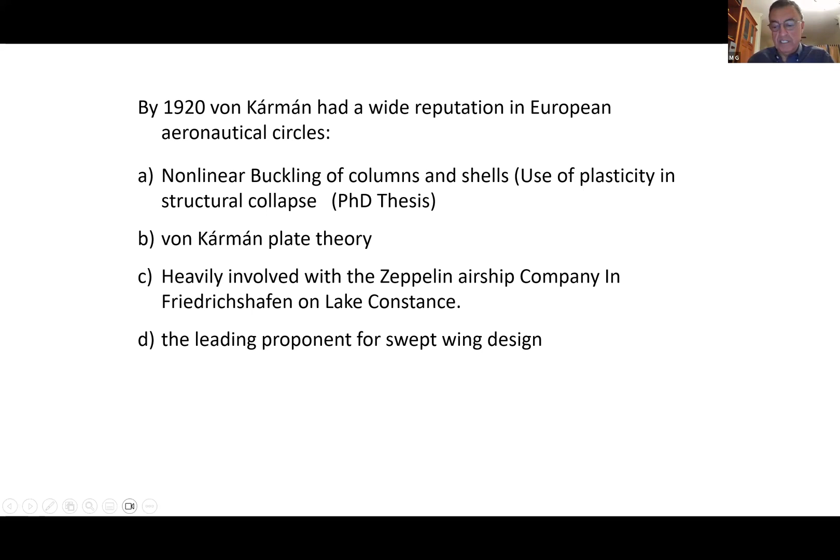Then came along von Kármán plate theory, and then he was heavily involved with Zeppelin, the airship company in Friedrichshafen on Lake Constance. And also, even at that time, he was a pioneer in promoting swept wings.

Von Kármán became really famous as a name when he basically succeeded to explain why vortex shedding behind bluff bodies like cylinders or any structures, even islands, at really different Reynolds numbers have these staggered patterns. And he used a simple linear stability model in order to explain that.

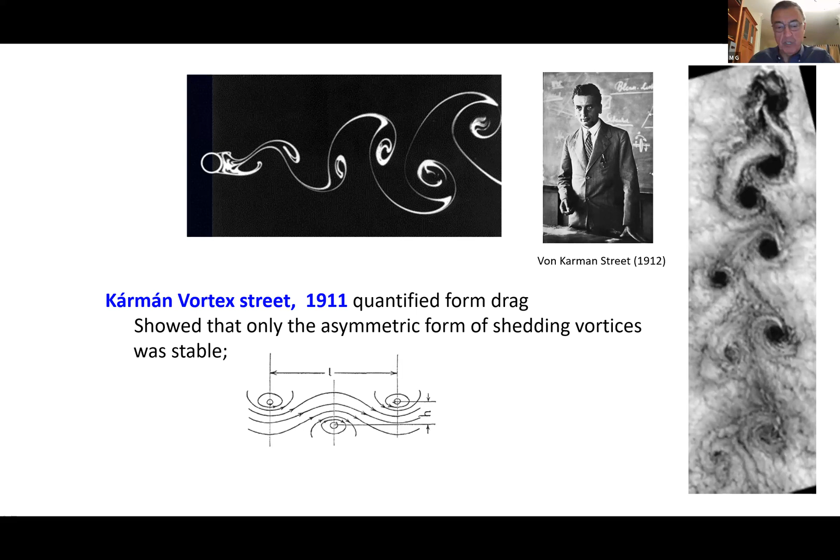And in that respect, he got the big credit. They even named the vortex patterns behind bluff bodies as Kármán vortices. And of course, these structures have been observed before von Kármán, but he was the one that actually explained why they are not symmetric, why they're asymmetric.

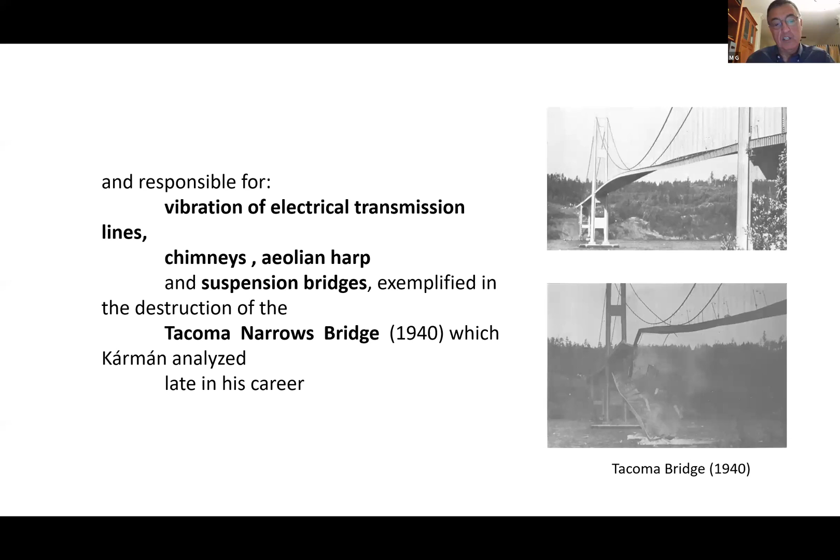And then he went on to explain the vibration of electrical transmission lines and chimneys, the Aeolian harp sounds that the electrical transmissions make under wind, and also suspension bridges. And later on in his life, unfortunately, with the unfortunate event of the collapse of the Tacoma Narrows Bridge in the 1940s, he was able to explain that.

But I believe that one of the most fundamental contributions that von Kármán has made was the establishment of the Graduate Aerospace, at that time Graduate Aeronautical Laboratories at Caltech, which even today is a leading research center in mechanics of fluids, solids, and propulsion.

It was started by a grant or endowment from the Daniel Guggenheim Foundation to establish an aeronautical school in Southern California, founded in the late 20s by Theodore von Kármán, who became the first director of GALCIT. Director in that term was both the head of department, chair of department, or at that time, or here even now, executive officer of department.

And due to his vision and the plans that he had for establishing this department, even today it has spawned and sustained the U.S. aerospace industry and ensured its prominent position for decades.

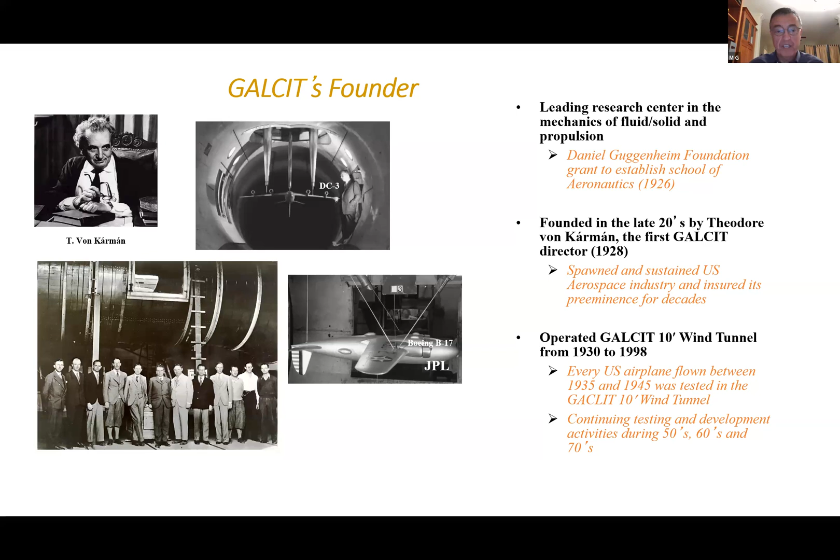But I think that another contribution of von Kármán to space science started when a student from Texas A&M by the name of Frank Malina came to Caltech in 1934. Malina was a graduate student of von Kármán. And then he had some very strange friends.

One of them was Jack Parsons, a self-styled chemist, not a student at Caltech, and Edward Forman, who was a hobby rocket fan. And then they were joined by another graduate student, Apollo Milton Olin Smith, also known as Amos Smith, and then another graduate student, Hsue-Shen Tsien, in 1936.

And there was an interesting bond among these five, their love of rocketry and encouragement from von Kármán. They started to work together, and basically began to test different rocket boosters right at the middle of the campus. And in that respect, they were called the Suicide Squad, and I will explain why.

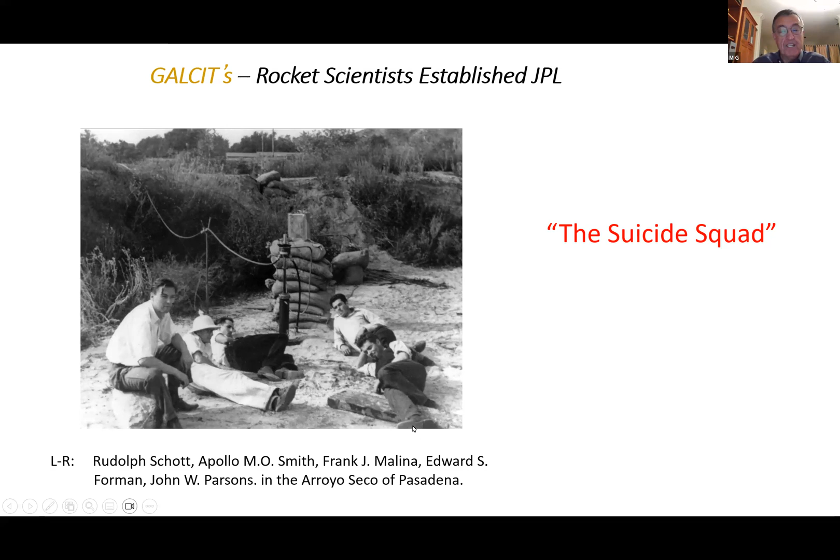They started to test these rockets, the boosters, right outside our building, Firestone building. They had a very primitive system, like a big pendulum, and they hung the rocket underneath and then fired it.

And from this angle, they measured the thrust. In one of those experiments, a rocket exploded. Unfortunately, at that time they were running the wind tunnel, and when the 10-foot tunnel was running, the whole building was under pressure, meaning pressure was lower than outside. It sucked all the soot and whatever came out of that explosion into the building and almost ruined all the instruments. And here comes really the interesting characteristic of what von Kármán was.

So instead of kicking all these students and hobbyists out of the campus and terminating their affiliation, he went to them and said, "Look, guys, I think rocketry is important. So we bought a piece of land north of Pasadena. It's called Flintridge, and you guys should go over there and do the testing, continue testing over there." This picture shows how they picked a part of the sandy riverbed and started to do the testing.

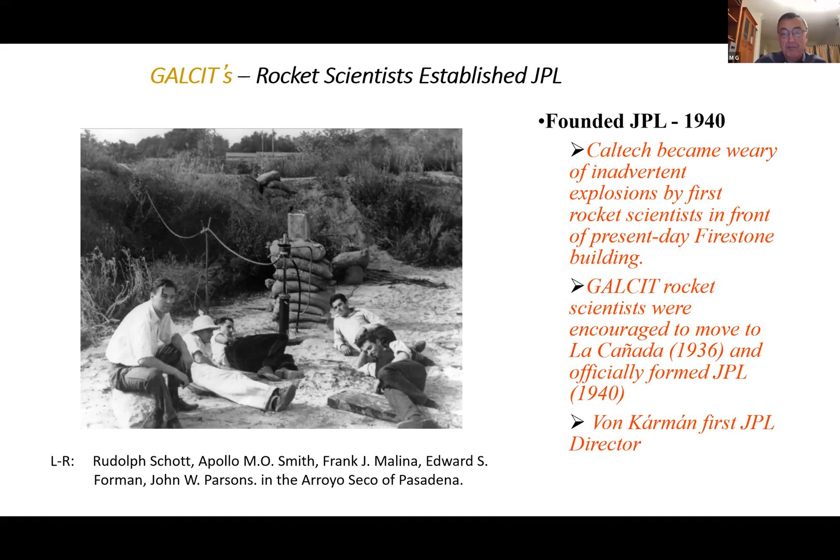It's interesting that they started this process in 1936 and officially formed the lab called Jet Propulsion Lab, or JPL. Von Kármán was unofficially picked up as the first director, but later on he became official director of JPL.

Now the group, the Suicide Squad, then later on continued their work, and they started many firsts in rocketry in the US. And they also started the first startup in the US, I would say — raised a little money and started a company called Aerojet that exists even today. It's one of the world's first rocket companies that was formed to go commercial.

And they used these rockets they invented to help airplanes have shorter takeoff distance. They call it JATO, Jet Assisted Takeoff. And then they started other businesses as part of Aerojet.

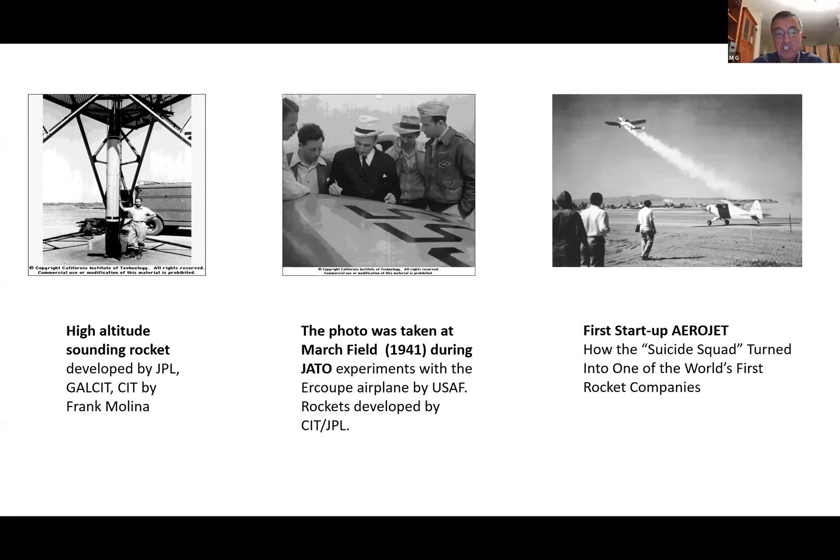JPL went on to do many firsts. The Explorer 1 was the first satellite launched by the United States, actually designed and built at JPL and Caltech. JPL was called Project Number 1 of GALCIT. The satellite sat on a shelf at GALCIT for at least 8 months before the U.S. Army decided to use it, with the Explorer.

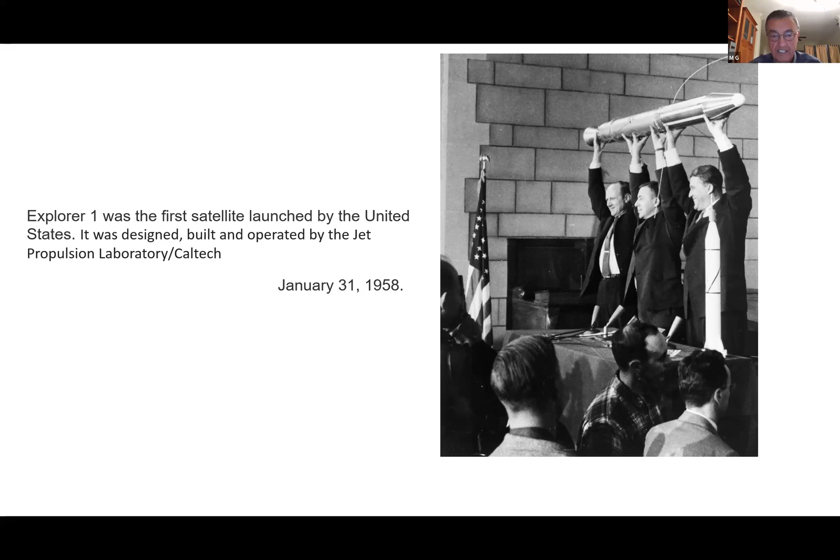And that was in 1958. Von Kármán went on to be the recipient of the first National Medal of Science, and practically became the first major consultant to the DoD, especially the Army, staying in Washington D.C. most of the time for the last 10 years of his life.

JPL went on to become a U.S. federally funded research and development center managed by Caltech, and is one of the 10 NASA centers. Currently it operates 22 spacecraft, 2 rovers, and 10 instruments in space, responsible for many space firsts, as you see in this slide — the first satellite spacecraft to Jupiter, Mars, and many others.

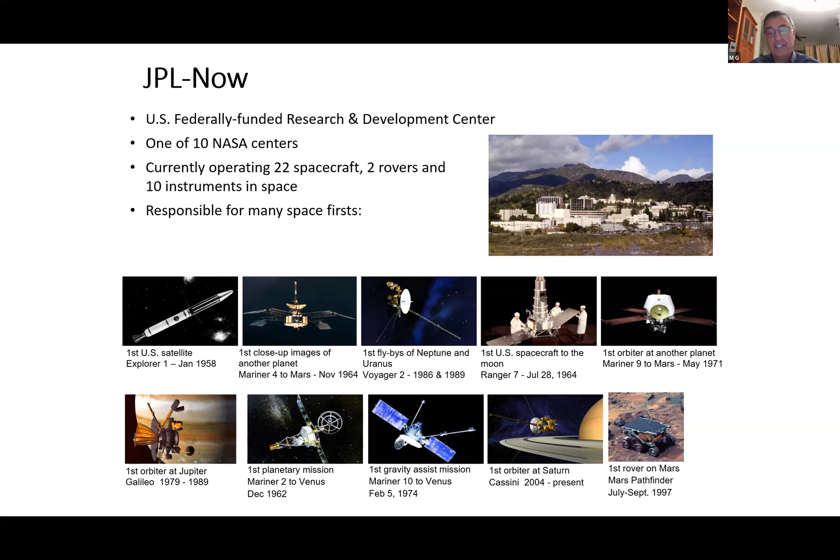One of the most recent adventures of JPL was the Perseverance rover. Basically it's a Mars rover designed to take samples and eventually return them to Earth. It was launched successfully on July 30th, 2020, right in the middle of the COVID pandemic in the US. And it was very successful.

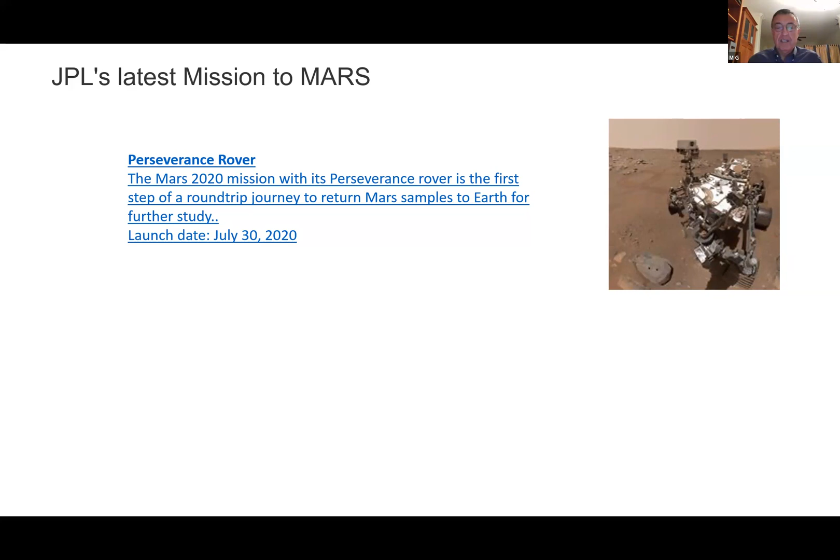What's interesting is this rover had a little companion, a guest with it. That guest was the first Mars helicopter, called Ingenuity. The Ingenuity Mars helicopter is a small autonomous aircraft sent to Mars to perform experimental flight tests to determine if powered, controlled flight at the Red Planet was possible.

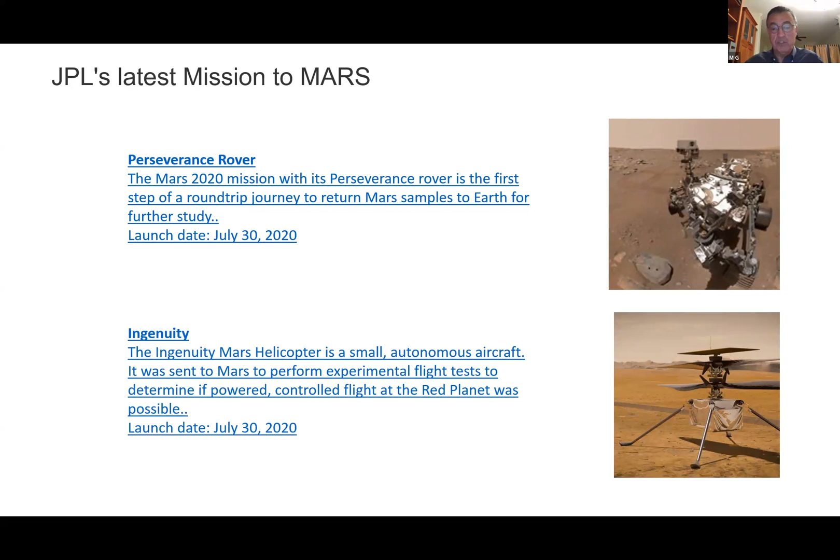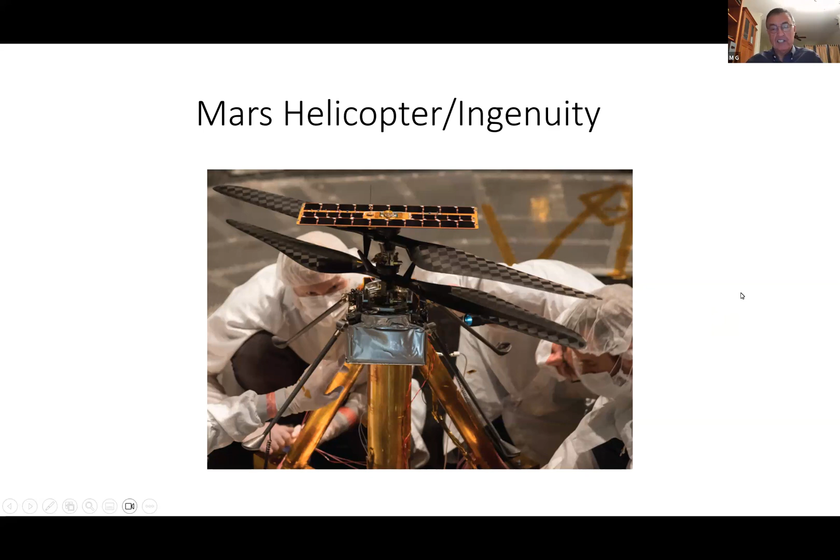And it still is operating — this is 2024. It is a very interesting design, a coaxial double blade helicopter type design, and it overcame many challenges that, according to some experts, were almost impossible at that time. But the group of engineers at JPL and Caltech together actually made this little flyer able to fly on Mars.

Now, you may ask why double blades. First of all, double blades have been used before. It wasn't anything new. You can see that George Cayley in 1796 had a design like that. Of course, you can see many helicopters and also drones have it.

It allows torque cancellation, and for payloads that require to be small, it provides compactness and also redundancy because of double blades. Disadvantage of such systems is that they have lower aerodynamic efficiency, and they're more complex in terms of the machinery to drive.

And also in power, the power is usually thrust times the flow through the disk of the blades. If you have two different blades, you'd expect double the power and thrust of the single one. But when you combine it, the disk area remains the same, so you can calculate the disk speed, meaning the flow through the disk, then the efficiency, the power requirements are actually much higher - the square root of 2 higher - than if you have two single blades separately operating. So even though efficiency was not good, it provided the torque cancellation.

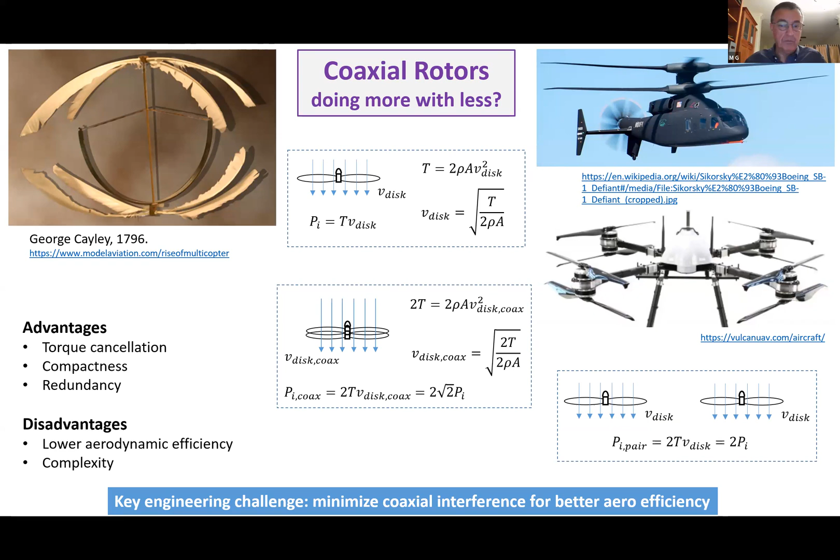Otherwise, you should have a tail to cancel the torque. And it also provided the compactness, which is really important in terms of how payload can be put together as part of the original rover.

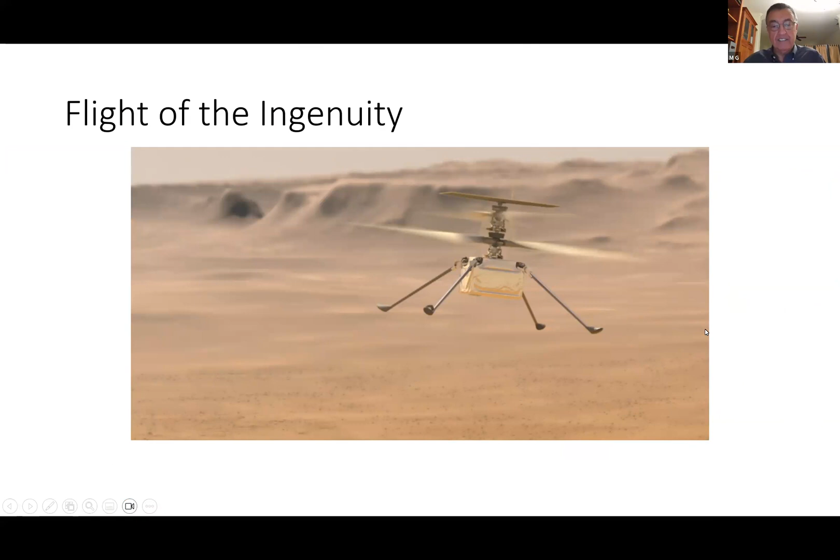So it's successfully flown, and it provided many firsts, and we'll go through my talk through it.

But what's interesting is that 100 years earlier, in another pandemic known as the Spanish flu - nothing to do with Spain, but somehow they call it Spanish flu - von Kármán was working on that with the Zeppelin company, and he was tasked to design an observational platform, manned or unmanned, to be tethered and used for monitoring the battlefields at that time for the German army or Prussian army.

And the idea was that instead of using balloons, which have much larger footprints, to use a system that is harder to bring down. So he and his engineers, Petróczy, Kármán, and Žurovec, designed this helicopter-like observational platform for scouting. And this is exactly the same mission that Ingenuity has, to scout for the rover.

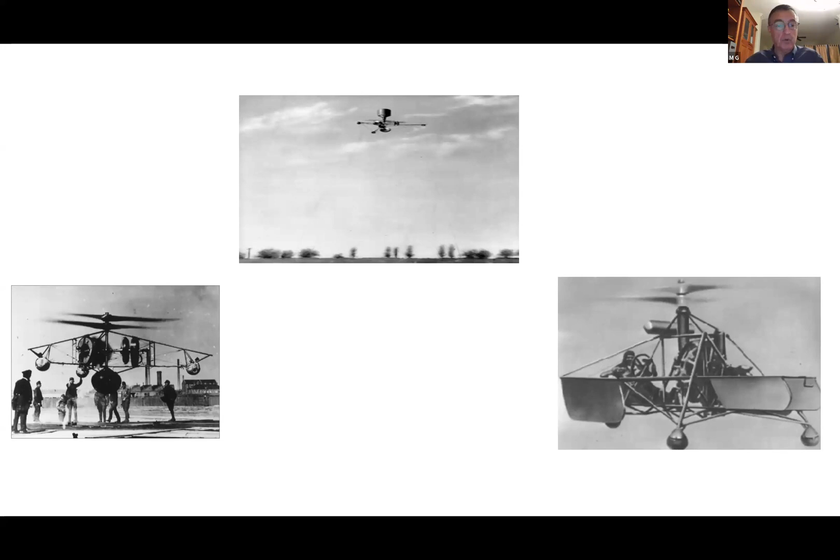They successfully flew and used it during World War I. And this is interesting, that they built both the manned and unmanned version of the same system that they used.

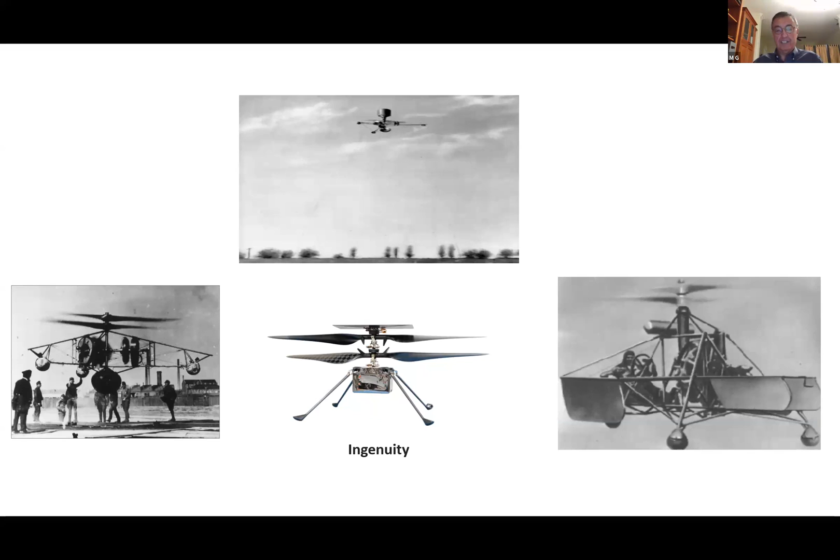What is interesting is to look at the similarity in design between the Ingenuity and the PKZ observational platform. It's interesting because von Kármán designed that one, and his students later on basically formed JPL, and later on GALCIT. They also came down with the same design, almost the same design, and that similarity was quite interesting - whether there's any relation or not, but even the serendipity of it was fascinating to us.

Now, to show you a little video, I would like you to pay attention to this little machine here. This is a real video of how the Mars helicopter actually flew in Mars's atmosphere, on Mars.

Very stable, and it provided very interesting images that usually it was difficult for the rover to go to the regions of interest - almost impossible for the rover to climb or go take a look at, say, volcanic areas.

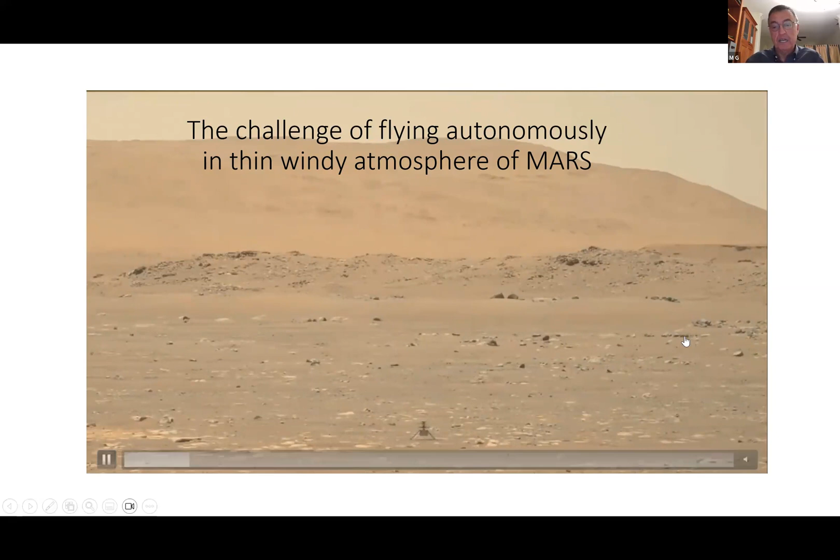But it wasn't as simple as I described. It provided many challenges. For example, the idea was to prove that powered flight in the thin atmosphere of Mars was possible.

The red planet has lower gravity, of course, 1/3 of the Earth, but its atmosphere is just 1% as thick compared to the atmosphere on Earth. So it also had to demonstrate that miniaturized flying technology is possible - that you can pack enough power, battery, and aerodynamic efficiency to be able to take off.

And perhaps the most challenging part was also operating autonomously. Ingenuity could only use solar power to charge its batteries for each test flight. And it should be performed without real-time input because it takes almost 14 minutes for the signal from the operator to reach Mars, to provide any command.

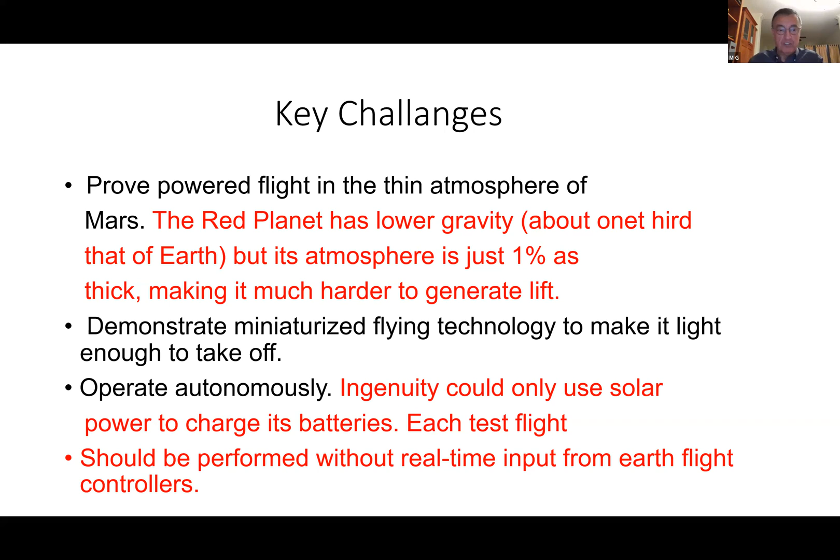And all three of those, each one of them, could have been a big showstopper for us.

Now, so at JPL, in order to study the performance of this flyer, they have this environmental chamber. It's about 27 feet wide, 85 feet tall, and they could basically simulate Mars's atmosphere.

That table shows the pressure of Mars compared to Earth, and the test section or test ambient chamber was close to 1,000 - we could bring it down. The density, we can get very close to what Mars's atmosphere has, and if you look at it, the kinematic viscosity also could be very close compared to what we see on Mars.

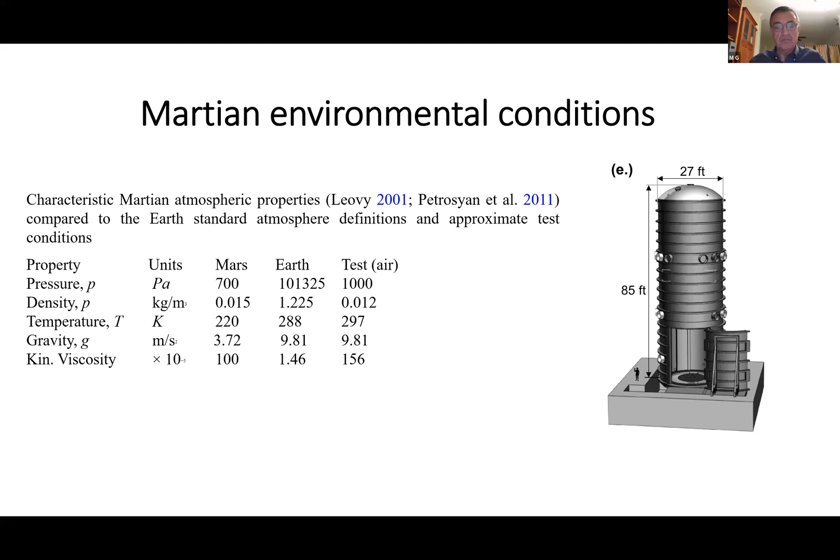Now, the point here is that even though we brought the pressure down, the density down, the chemistry was different, because Mars's chemistry is more CO, CO2 compared to Earth's, which is more nitrogen. But from a performance point of view, it wouldn't make any difference.

In that environmental chamber, to simulate Mars's atmosphere, you can only go up and down. But for a Mars helicopter, it was important to be able to do the cruising, to move around. So for the control software, you needed to perform hovering plus cruising. Hovering was possible in this chamber, but cruising was almost impossible, we only have 27 feet, and it would have been dangerous to try to avoid the walls of this big tank.

So JPL engineers approached me and said, 'Look, can you build a wind tunnel that can simulate Mars's atmosphere?' I can imagine my first reaction, 1% density, it's going to be difficult. But no, let us look at it.

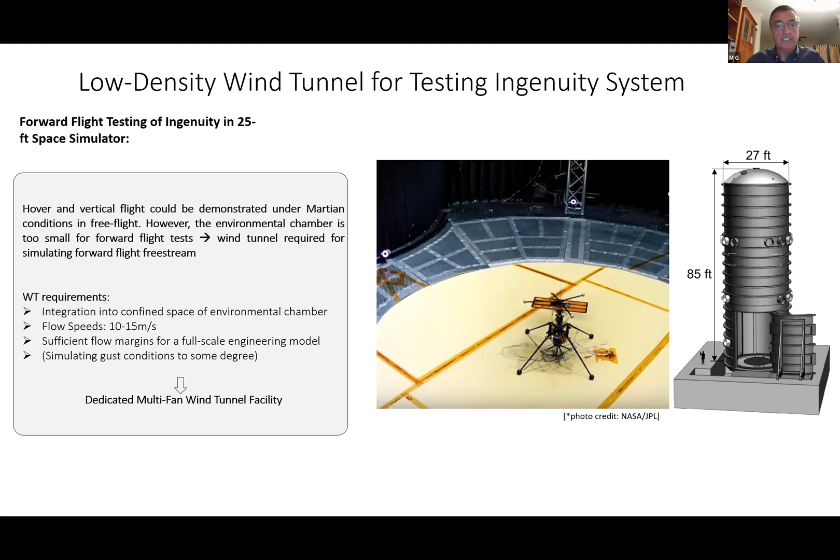And I had a very important group, I would say a clever group of students, that when I proposed this to them, they didn't even blink, and they said, 'Yeah, we'll take the challenge.' And the reason was that this same group of students had together designed another type of wind tunnel, which I'm going to go over, and you'll see how we could transition from a wind tunnel for Earth to a wind tunnel for Mars's atmosphere.

Chris Dougherty, Marcel Veismann, my graduate students, and Jason Rabinovitch, a graduate student of Professor Beverley McKeon, and then the undergraduate Alejandro Zavala was also involved, along with the chief engineers at JPL, Amelia Quon, who was the project manager for the JPL site. So of course, she had the army of students and engineers that could help us with the design and implementation of the tunnel.

Now, we have a center at Caltech called CAST, Center for Autonomous Systems and Technologies. And at CAST, we designed a very unique type of wind tunnel. It's about 10 feet by 10 feet, and it has about 1,296 individual fans clustered in 3 by 3 groups. The tunnel, or fan wall, could operate either vertically or horizontally or any angle in between, and we could control each fan individually to provide all kinds of different flow conditions.

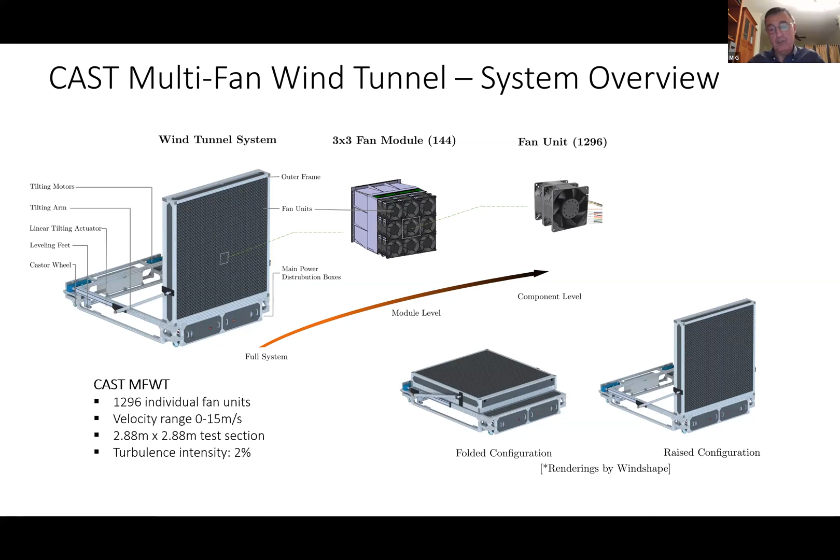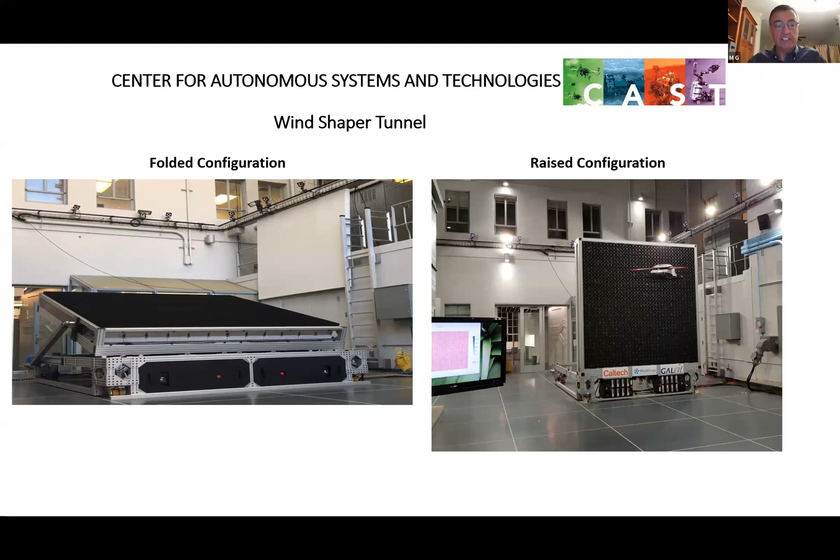Here it shows the operation of the tunnel as it goes to different angles. We could basically do hovering by blowing the air vertically against gravity, or use it horizontally as a normal wind tunnel. You can see here it's in a large arena, and we test different drones or systems that need to see different flow conditions, like gust or shear.

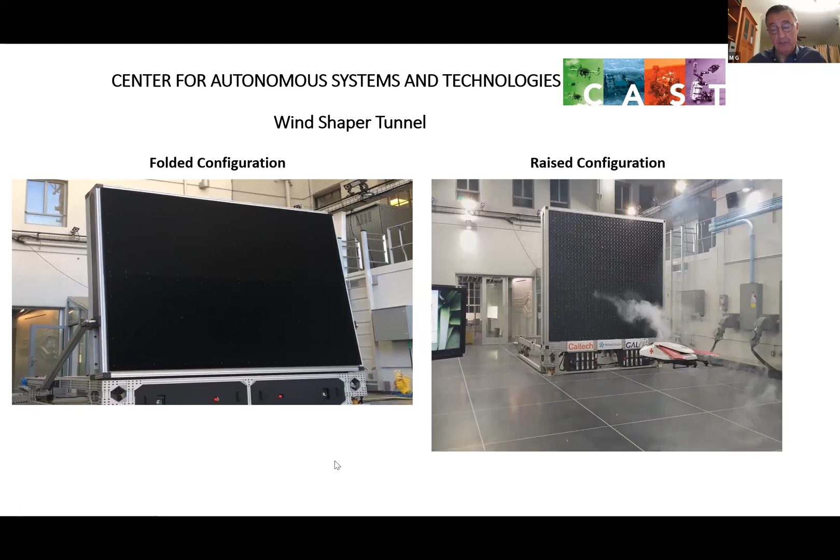I'll let you watch this for a second, it's quite impressive. And these are all designed by graduate students. Of course, we also had an outside contractor that built some of these components, and it was put together here.

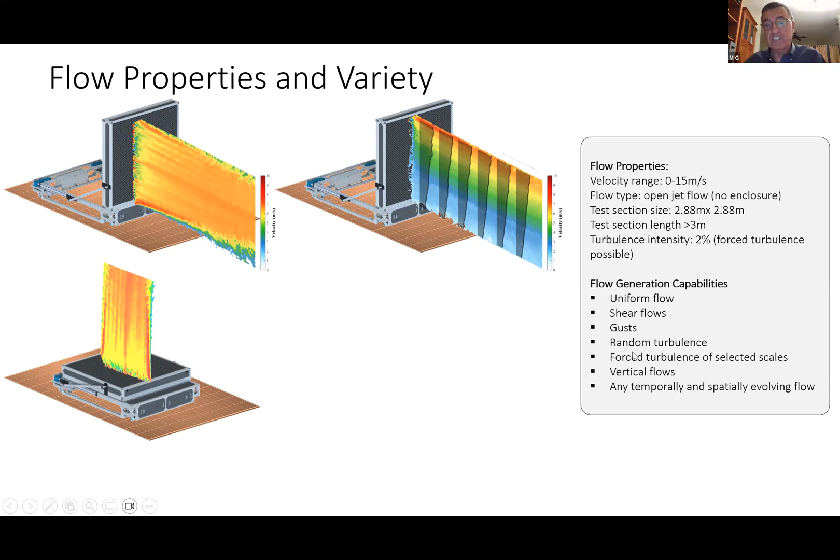Now, this tunnel, as I mentioned, can provide vertical flow, horizontal flow, and different shear, uniform flow, gust, or random turbulence. So you can see this is, for example, what you see on the screen, and you can basically put random turbulence in it or shear, as you see in this plot, to provide different conditions.

So the control software should be able to handle this under different conditions on Earth, or later on, as you will see, on Mars.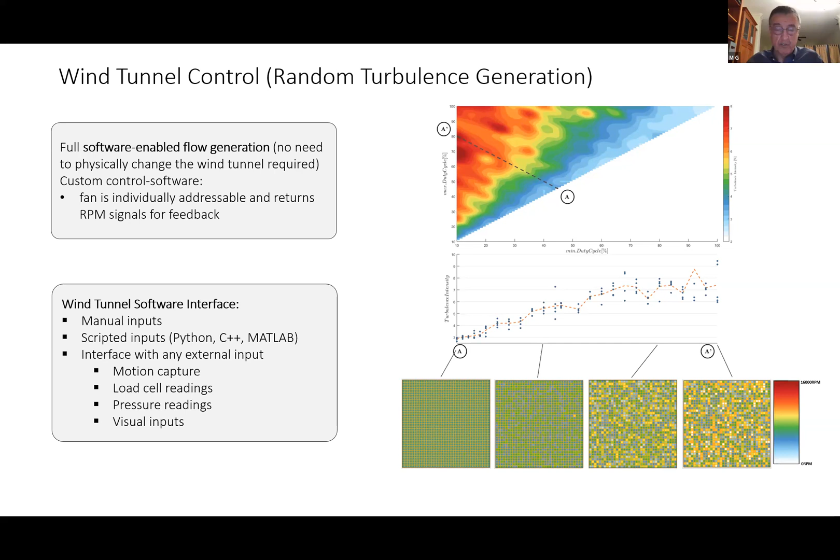The whole tunnel, the environment, has motion capture, and we have all kinds of different measurement tools, from PIV to laser Doppler, to all kinds of flow characteristics, as required by the researchers in the group or in the department.

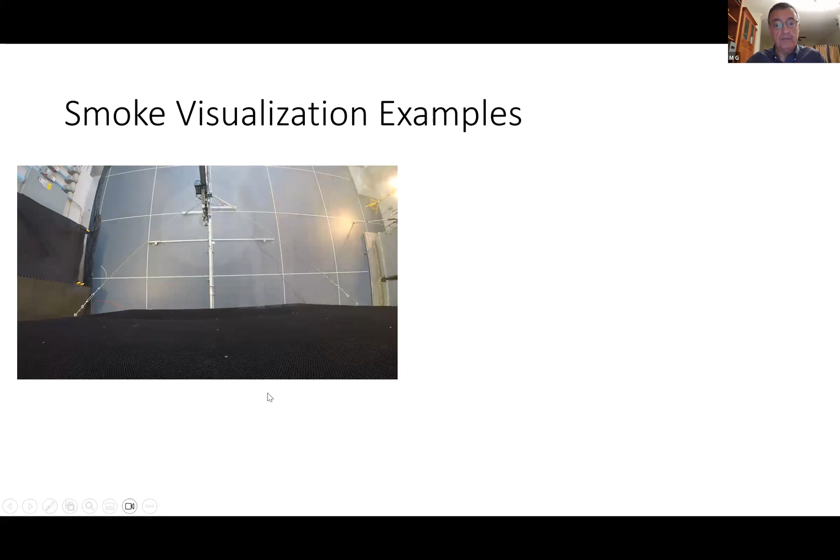I think the challenging part was how to duplicate this wind tunnel for the environmental chamber at JPL. Here you see a picture of it, this is actually the size scale, and this is the actual picture of the fan wall that's inside the tunnel. It's about 1.7 meters by 1.7 meters cross section.

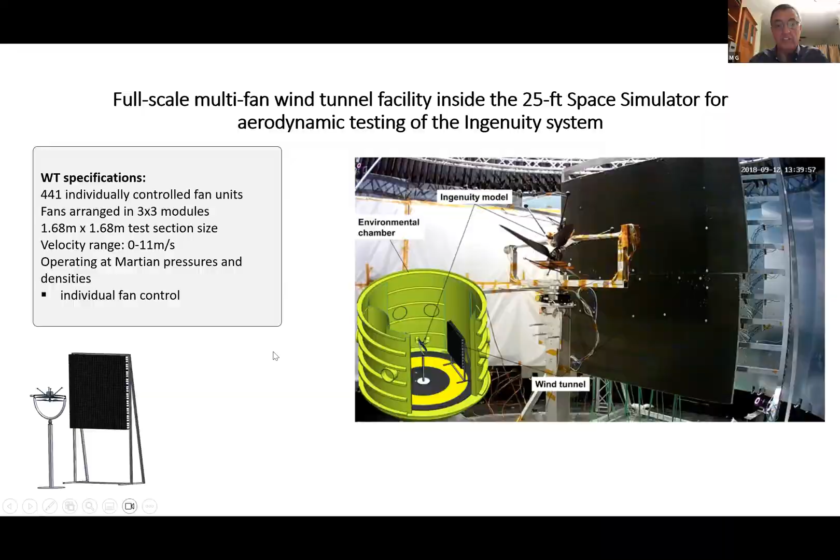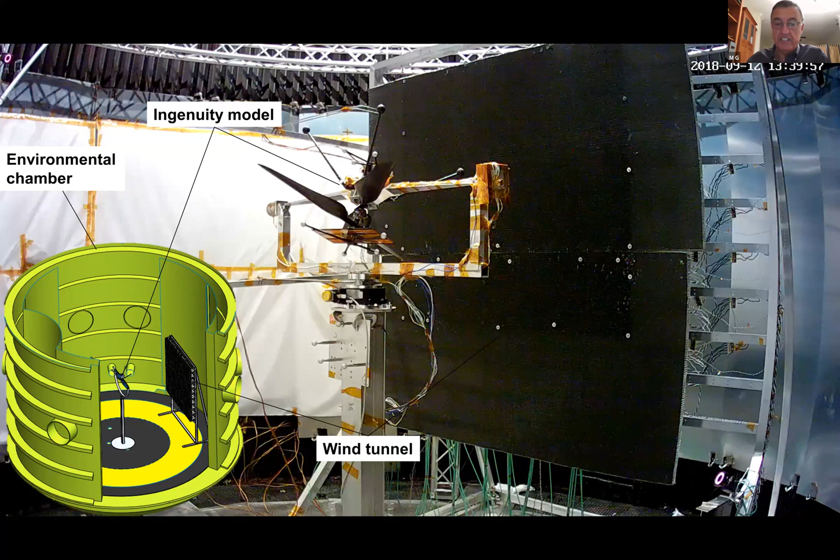It can go up to 11 meters per second, right within the range of velocities that we expect for the Ingenuity to operate on Mars. Each individual fan could be monitored. This is a close-up, and it was on a force balance, and later on was flying without any tether inside this tunnel.

One might ask, how did we design this tunnel? So we used a very simple, basic fan laws that, considering the efficiency is the same, we can then get the ratio of the flows. Q1 is on Earth, Q2 is on Mars. So we can use different densities, diameters, different rotations, and these non-dimensional parameters are what people use, not just for the Mars thing, but actually for design of the helicopter blades and so forth.

Now what's interesting here is that in these calculations we assume the efficiency is the same, but in reality it's not. The reason being that the Reynolds numbers we usually operate, especially on Mars, are really low. We're talking Reynolds numbers not more than 10 to the fourth. This is, for example, the Reynolds number we expected the Ingenuity to operate at. Because of that, the flow is very laminar on the blades, and they're very prone to flow separation.

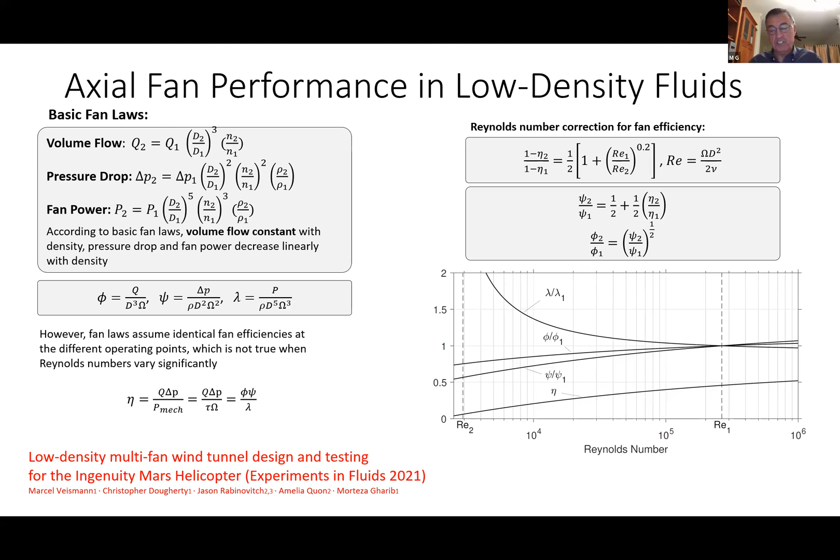Now, the other problem that we faced was a well-known problem, called vortex ring state. Imagine that as you hover, if you're not in the proximity of the ground, it's okay - the aerodynamics is basically a disk model. But as you get close to ground, at some point the flow that hits the ground gets ingested back into the blade, as you see in this artist simulation. So it creates a closed environment, known as vortex ring state.

What happens in a vortex ring state is that suddenly the thrust goes down. So as a result, the lift is not the theoretical lift, or at least the lift you get as a reference. That's a very dangerous state, and as we saw in the environmental chamber, it actually gets much worse as you reduce the density. So the question was, what should we do?

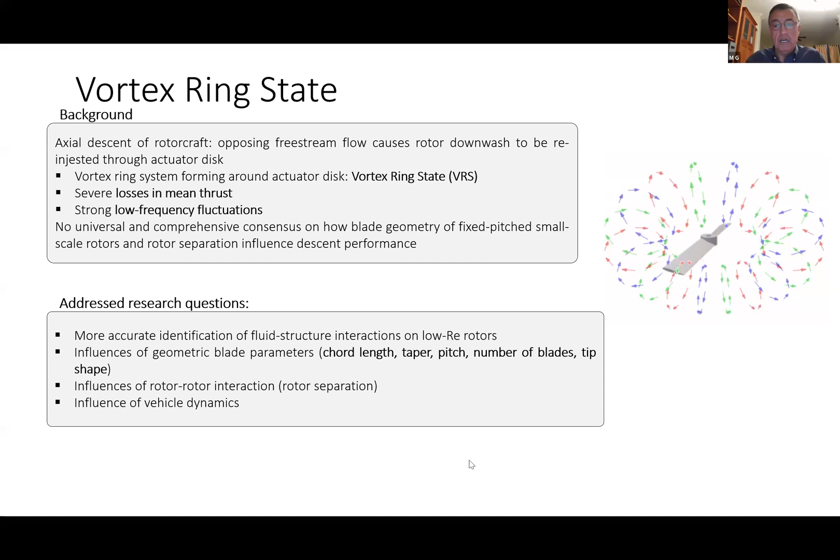So we embarked on some studies to identify what these vortex states are. Also, another state that follows the vortex state, as you increase the speed of landing, is called the turbulent wake state, where you don't ingest flow, but you create enough turbulence that the whole blade system starts to shake. That shaking is very dangerous, because all the flight control software we had, even though we knew what happens on Earth, we didn't know what happens on Mars.

But we decided to design a new set of blades that can reduce the danger of going from normal hover to safe hover, bypassing the vortex ring state and the turbulent wake state. The idea is that if you go too slow, you get trapped in vortex ring state. If you go too fast, you get into turbulent wake state, which creates lots of shaking. You need to basically go through that fast enough and get to a steady state that you can then land the Mars helicopter. These are basically the standard approaches you'd find in textbooks.

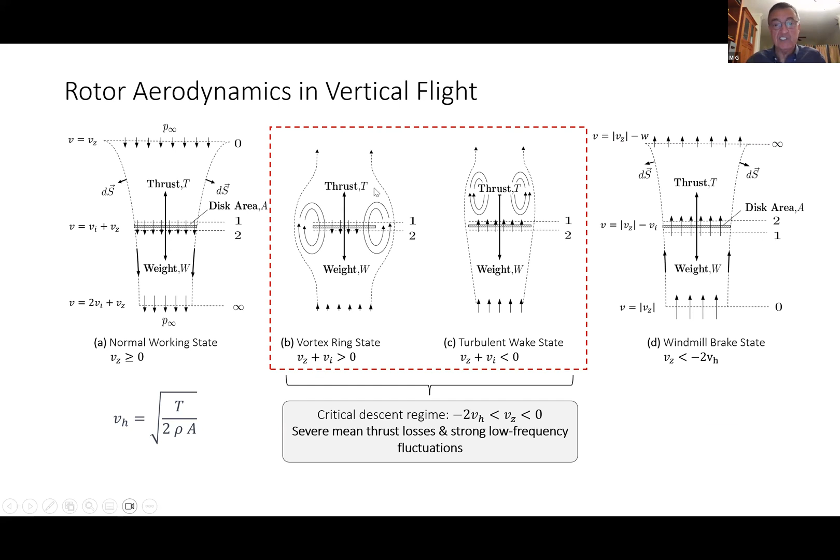The question here is: can we design a different kind of blade specifically to be able to bypass these dangerous states and go directly to a safe state?

Marcel, as part of his thesis, took that challenge to look at different blade designs. He designed a miniature fan wall, and put the blades on a force balance, and then by changing the speed of the fans, he could simulate different speeds of landing or hovering down.

Later on, he actually flew it over the big tunnel to see if the results of the tethered and untethered tests were equal in terms of performance of the different blade designs he came up with. We also used PIV, particle image velocimetry, to look at the actual physics behind this vortex state, and how the different blade designs can avoid those states, so we could have better performance later on.

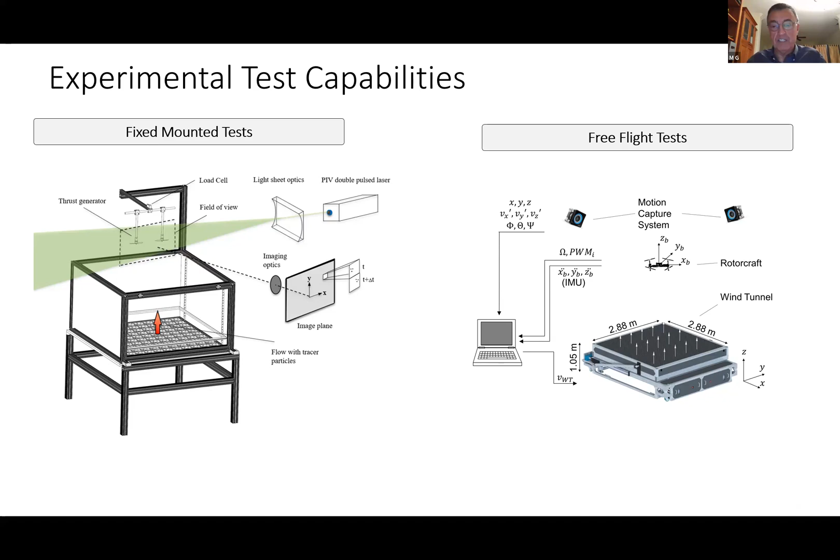I can bypass this quickly.

So usually what happens is that if you look at the thrust or lift of the blades, and as you change the climb velocity, you can see that there's always a minimum. This line here is where the vortex state is for different climb velocities. Now, if you normalize it with hovering, which is the reference, you can see that they all collapse.

And this region is the dangerous region because your lift suddenly drops. If your control software could not handle that, it's fatal to the whole helicopter system. So now the question was, these are reference commercial blades you can get. Can we design a different kind of blade that tries to reduce this dip, so control software can do much better handling of these situations.

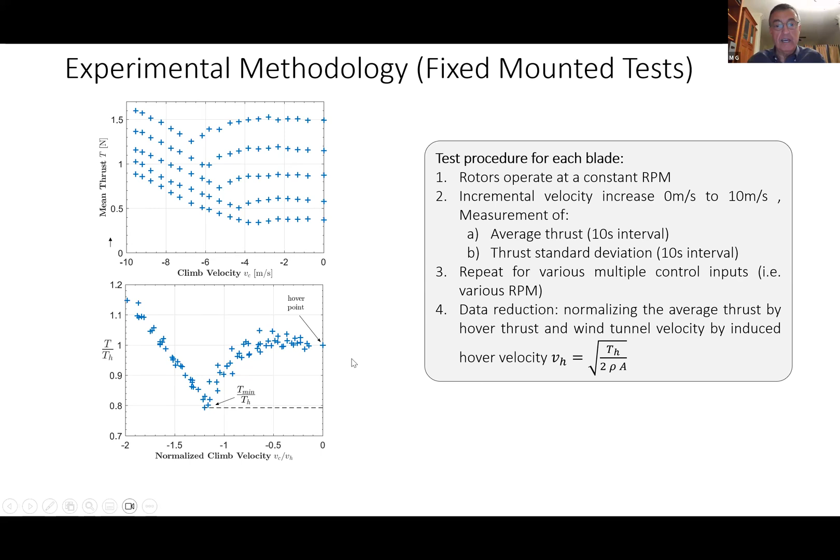We actually tried different designs, all kinds of different variations on different themes, sometimes the same themes. And then we went through this process of changing the hovering speed, and based on that, saw how we can reduce the vortex state, which was the gap or minimum that we saw. And here are some of the results.

If you recall, let's go back here. I'd like to draw your attention to b7.3 compared to other designs here, and look at their performance. Now if you look at this row, we have the reference, which is commercial, and then our designs. You can see that most of them show this dip, except one design, b7.3. Let's look at what is unique about that one.

The trick was, if you look at this design, it actually has a very sharp or thin tip compared to all other designs. Of course you could see the trend that as you get narrower and narrower, but it seemed that one was the winner in terms of trying to get out of the vortex state, which is this deep minimum.

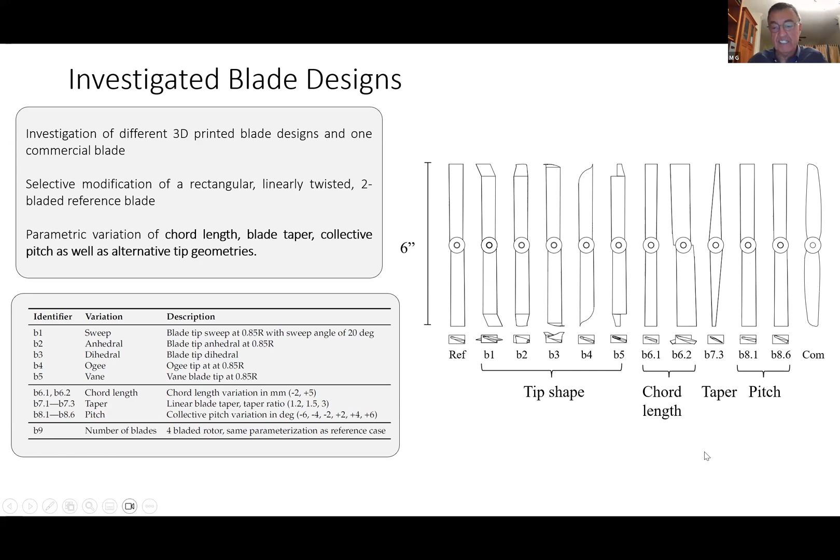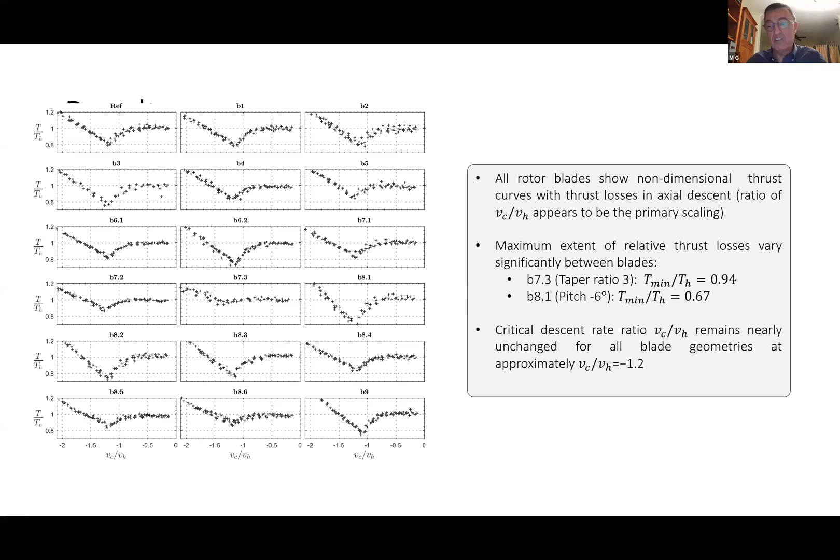So this was kind of a unique discovery that we made, which was not really well studied before. And compared to 8.1, we said it's 0.67, which means you lose almost 30% of the lift very quickly, and you need to take care of that.

Now let me just go through this. It shows that we normalize the thrust, and this is the minimum. You can see the minimum actually increases, which means this is very good performance. Anything we did over these commercial ones actually improved the performance by increasing the minimum, meaning making it more flat.

These are more of this. You can see that we actually could make it really much worse than even the commercial ones, and that was 8.1. So anytime we use the chord length - increasing the chord length reduces performance, tapering it increases performance, having a pitch increases performance, but increasing just the number of blades reduces that to a point that it becomes a disc, with no performance.

So let me just show this - this is the compilation of all the results we have, which is actually a good design table for the future if you wanted to get different performances.

Now the other things - remember the turbulent state - we were more interested in what kind of... let me just... on the turbulent state, we also realized that this is the level of fluctuations. I think I'm showing the wrong one, sorry. This, if you can allow me.

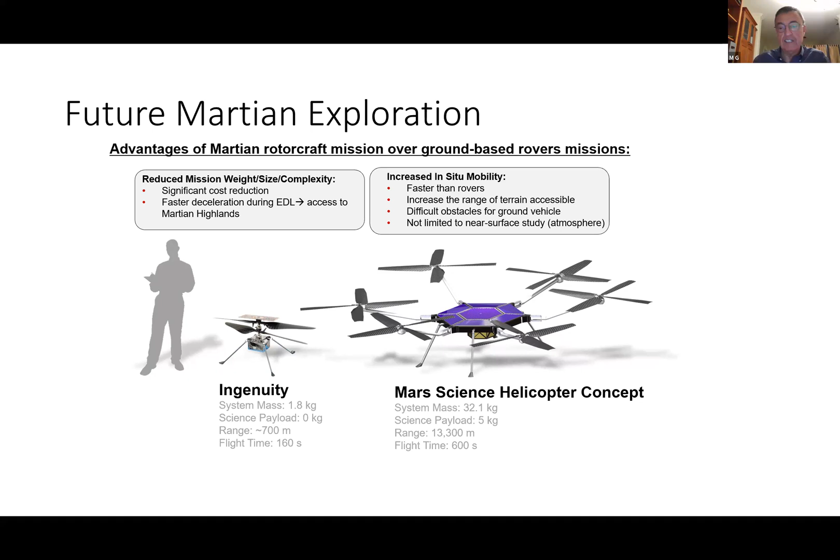There are at least 20 proposals, which can be categorized into two approaches. One is to add more blades and make the helicopter a drone, so there's no driving around—it's more flying, landing, flying, takeoff, landing. This design has also been studied at Caltech.

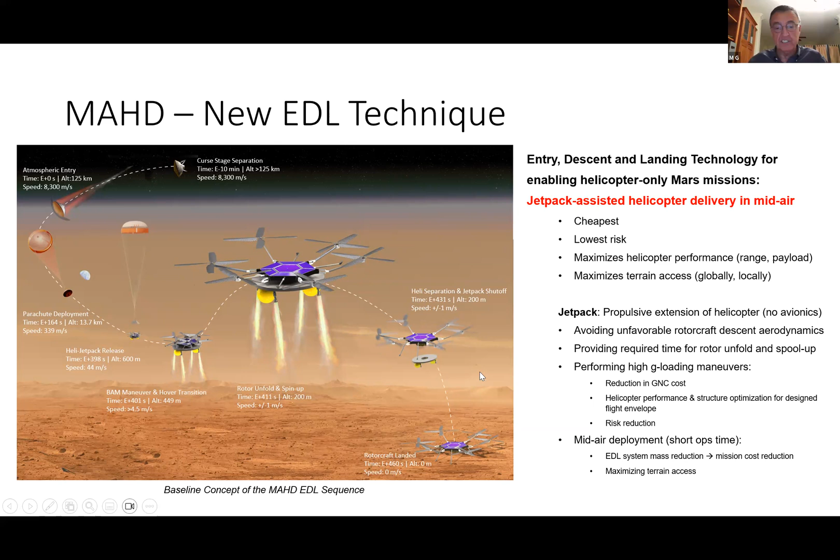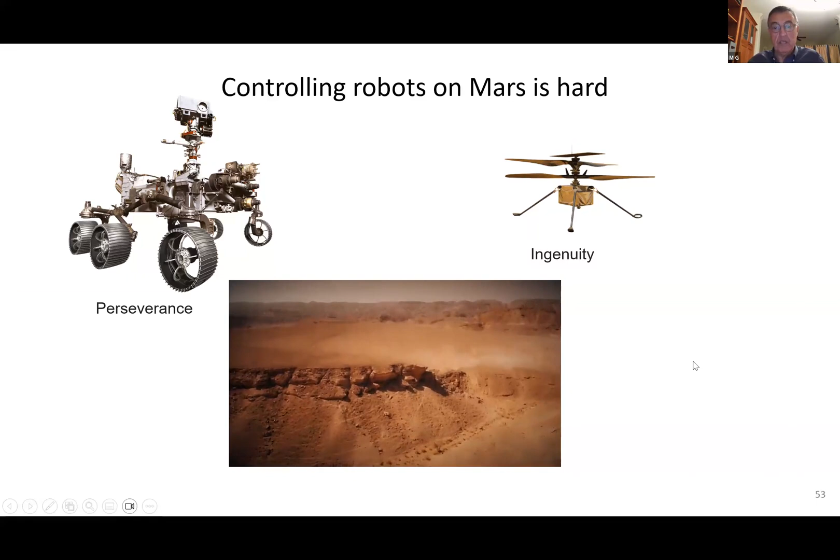At Caltech's Center for Autonomous Systems and Technologies, we asked: why not think of a different approach? We have Ingenuity, which is a good scouter that can go around and look at things, and the rover can go there and take samples. The idea was, what if we combine these two? That was a big challenge—you want a rover that can fly too.

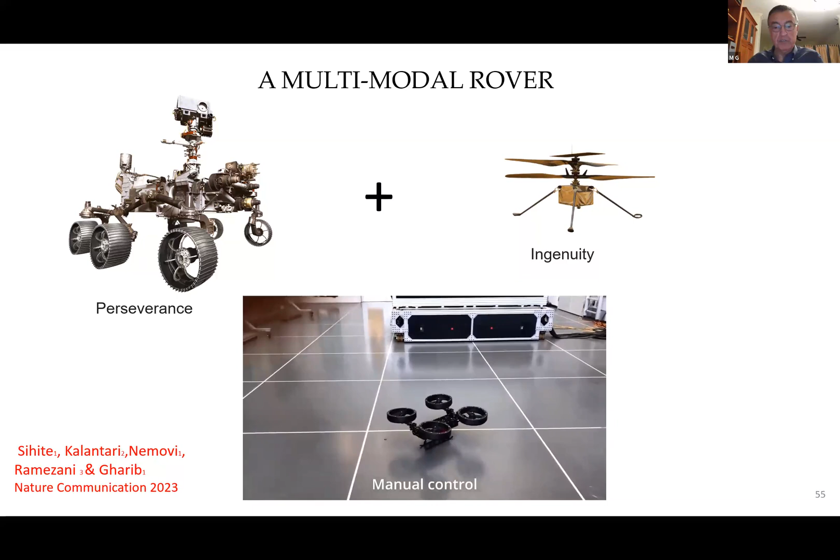So we designed a system we call the multi-modal mobility morphobot, or M4. The idea was to have a rover that can transform into a flyer—just think of the sample video—able to transform and go around autonomously.

Another group of students designed this system, and as you'll see, they did lots of testing. This is actually its first flight—you can see lots of instability.

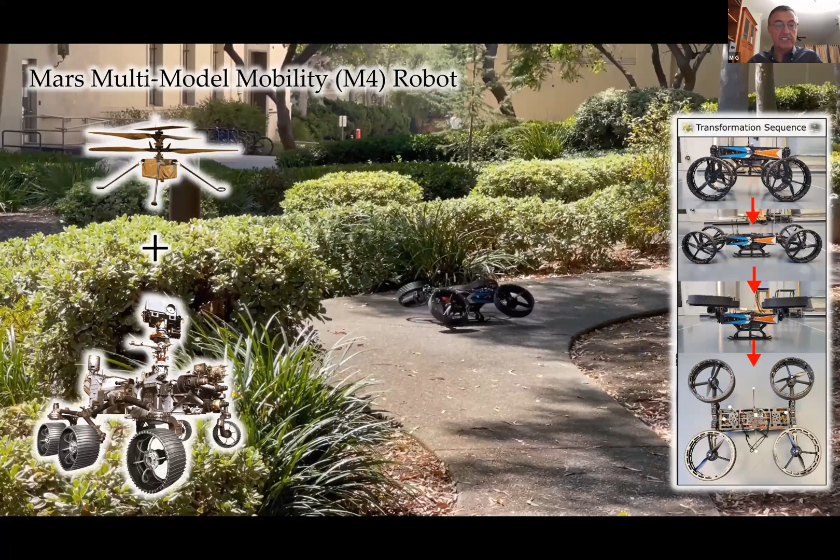This is a view of the machine we designed, operating autonomously around the campus—it sees the bushes, has to go over the lake or pond, and decides, no, I want to be a drone now. So it morphs from basically a car into a drone, and this is all done autonomously.

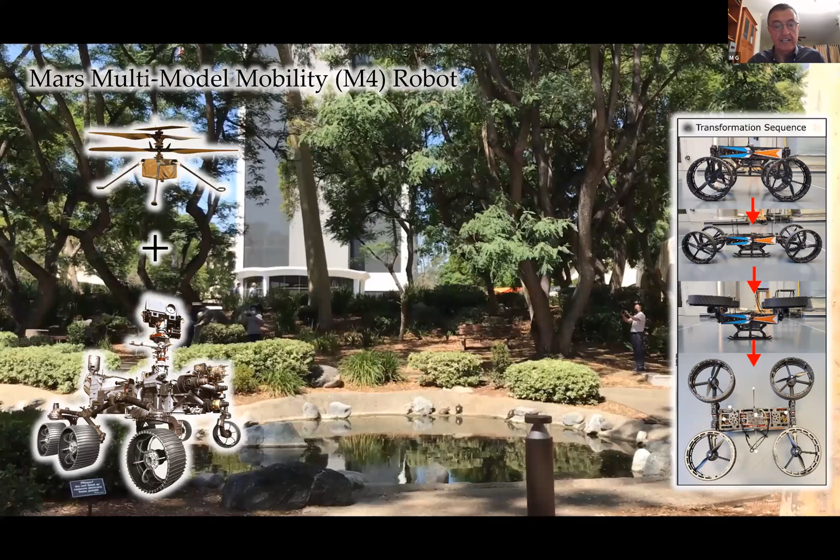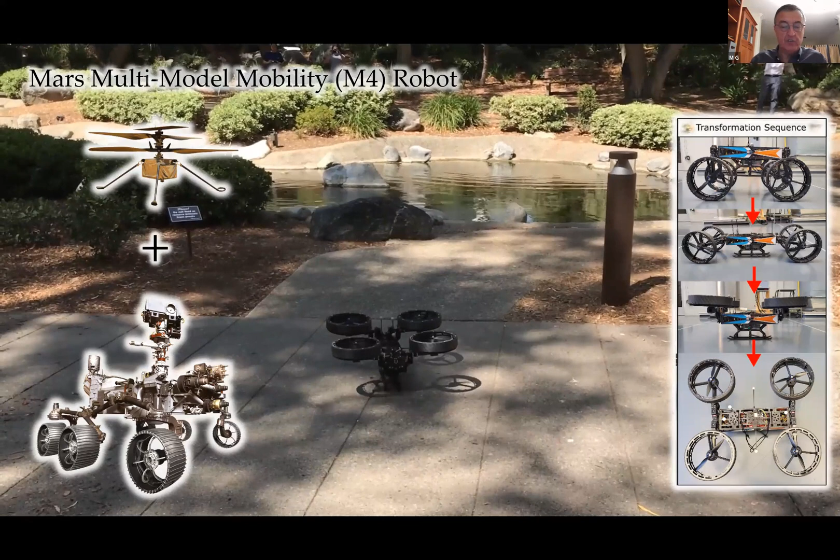This is another view from the front camera. It took off because there was a bush in front of it, then flew over the pond, landed, and transformed back into basically a car.

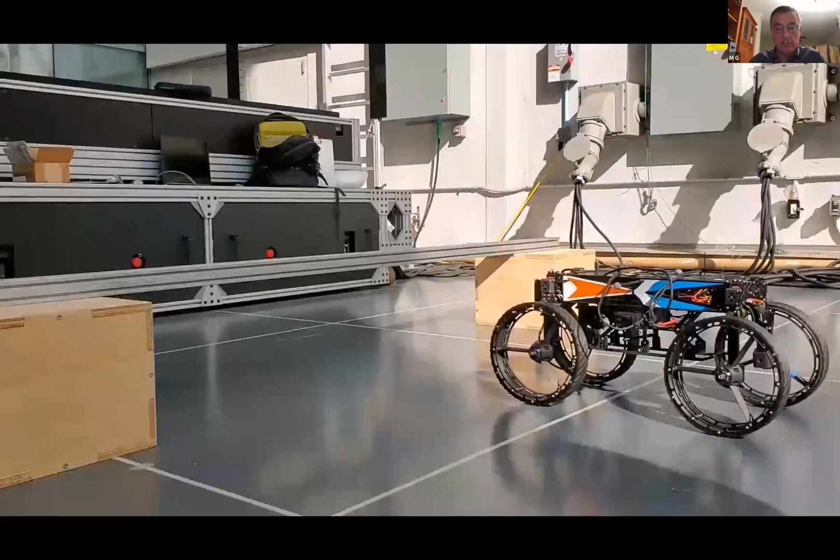This was a big challenge for us, because people asked, can it do other things? Since it has to go through narrow passages, it has to be able to change its shape more than just going from a flyer to a car. It realizes it has to change its shape to get through these narrow passages.

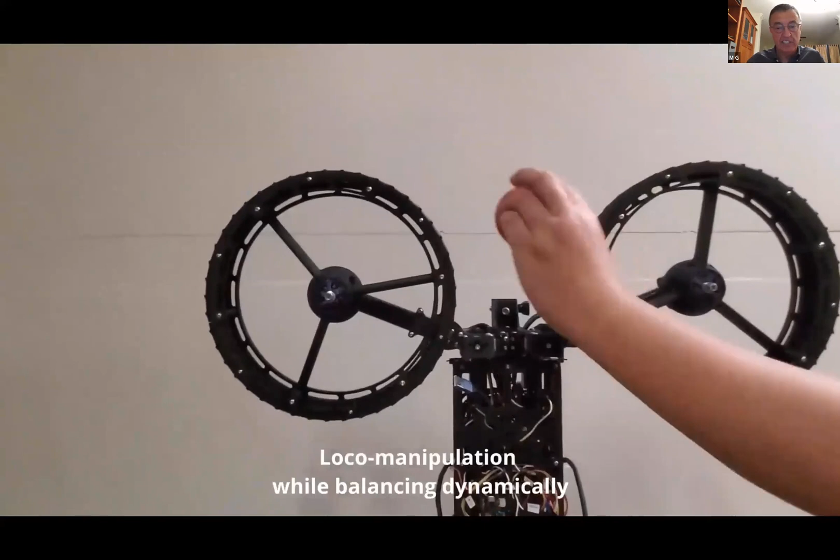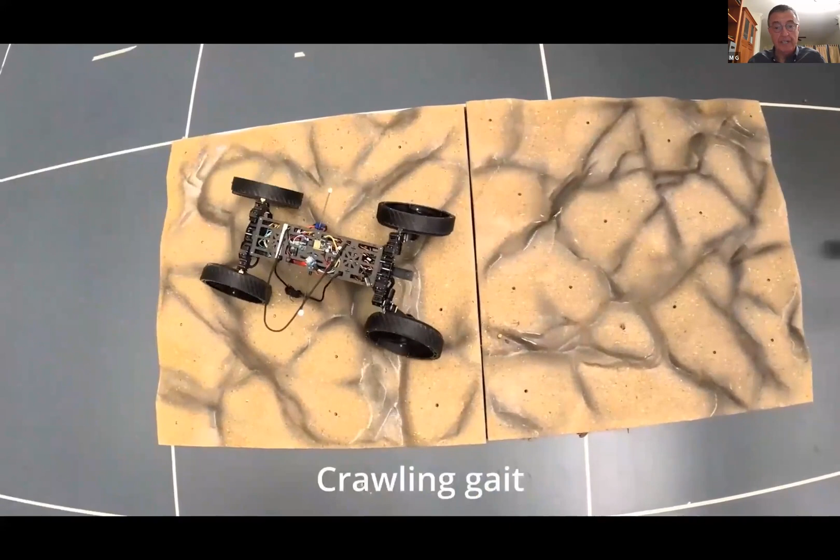Or in this case, it can grab something and hold onto it. The graduate students had a lot of fun with this, enabling it to climb in situations where the wheels simply can't work.

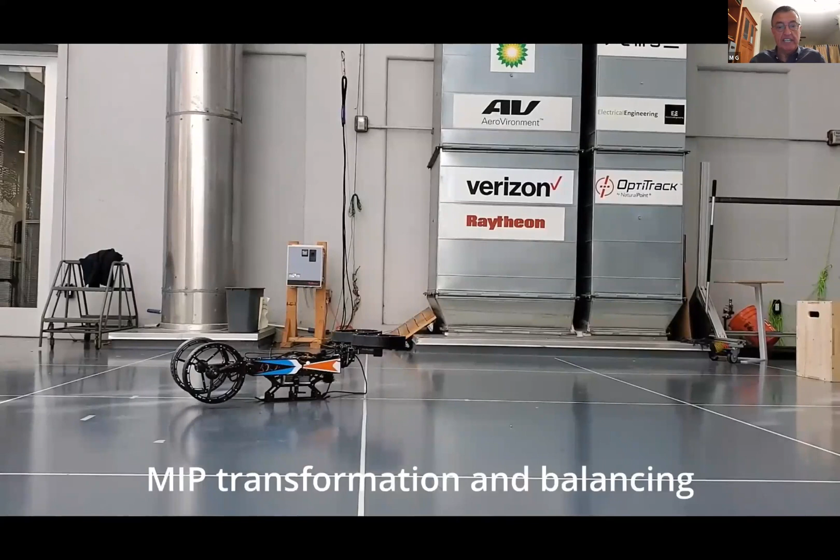In this case, it becomes a Segway, meaning you can actually stand up. This is good for observations. Still, this is a research project, but the fact that you could do that was by itself impressive, and it can very slowly land.

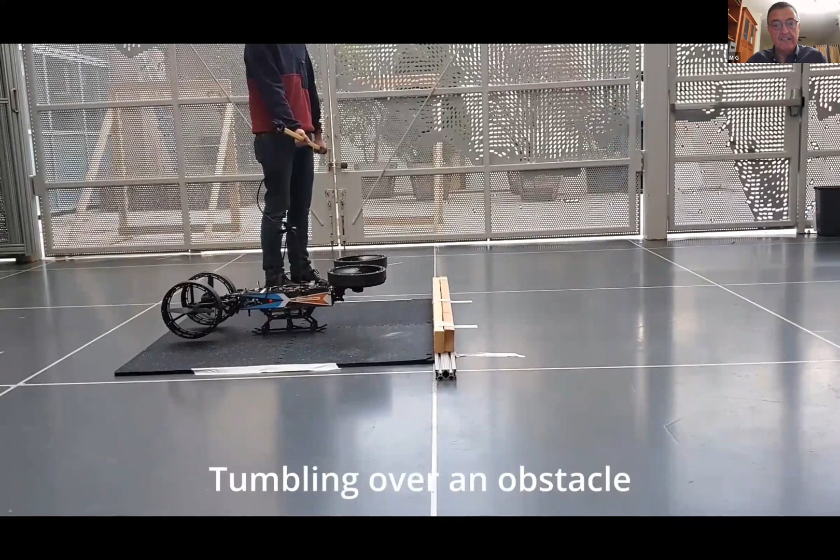This one is different, this is an obstacle, so it lifts up. The person over there is just making sure this doesn't go haywire.

That's quite impressive when you see it in action. Then I think I'm at the end of my time, and I would like to leave some time for any questions that the audience may have. Thank you very much.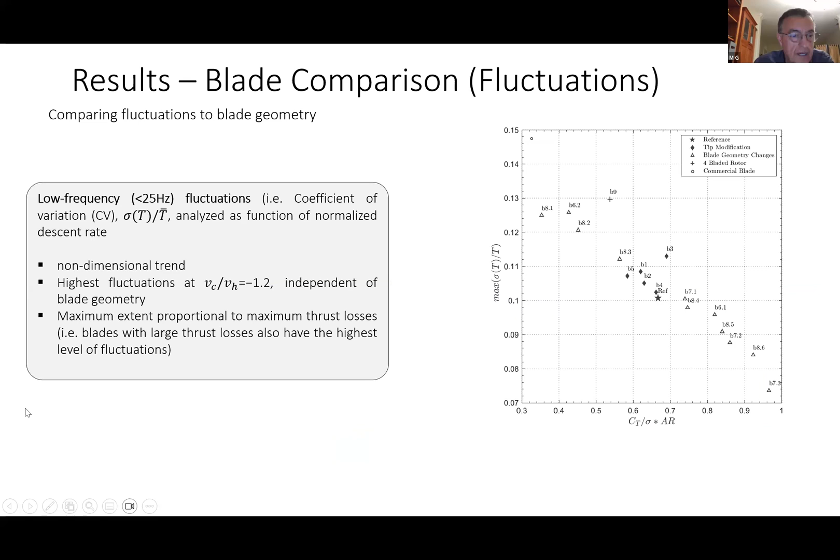Are you talking about the drone arena or the vacuum chamber? Your drone arena, where you have 1,200 fans made for that particular wind tunnel, which can turn vertically or horizontally. Yeah, so it's not in a room actually. I didn't show it, but basically the flow goes out, so it has an open exit.

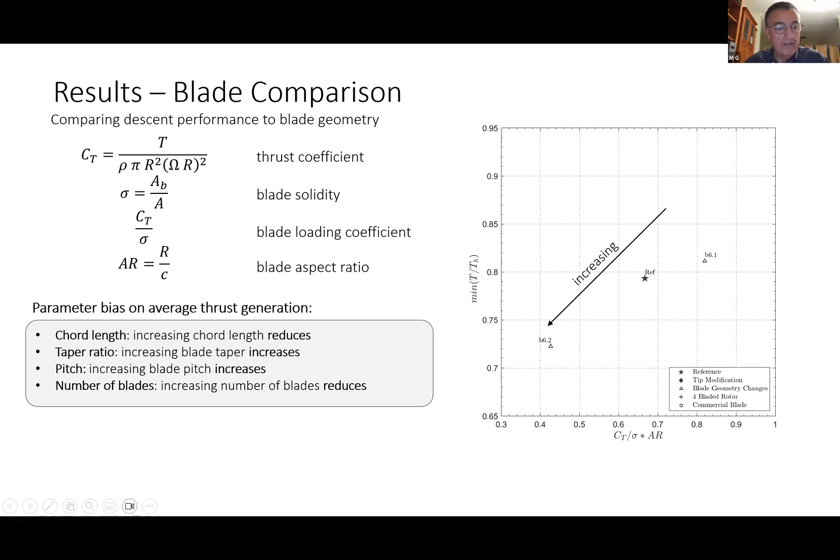But we studied it carefully there also because the air somehow goes around the tunnel. We did lots of CFD and also confirmed it with our measurements. And maybe I can quickly go to...

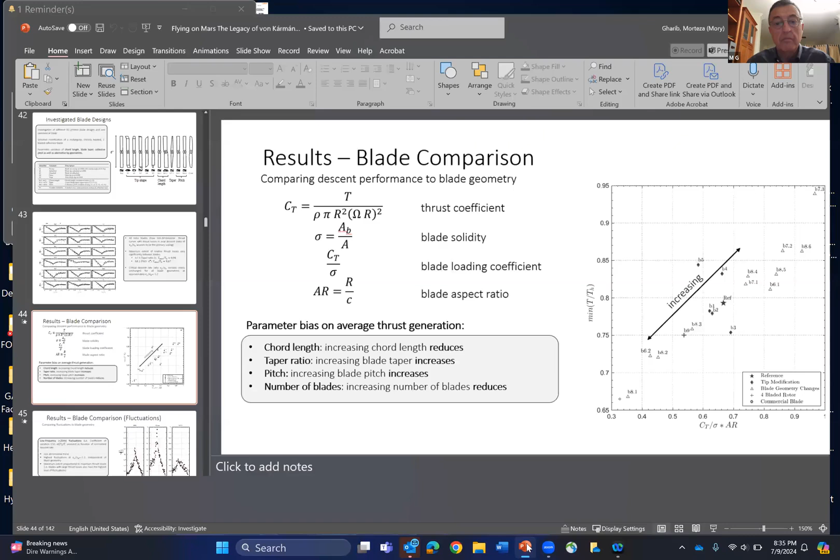Do you see this? Yes, that's exactly what I was asking. So the side I'm sitting on right now, looking at the tunnel, it's actually open to atmosphere. Oh, okay, this is almost a 4-story building. So the return velocity going back to the fans is very small, very slow.

But then when you think about the density and pressure, how do you compare the performance in these situations, atmospheric conditions versus low density, low pressure? Well, what's interesting is we used hot wires for the vacuum chamber.

And in terms of performance and turbulence, they are inherently high turbulence wind tunnels, correct? Yeah, if you get to 2% or 1.5% you're lucky, unless you put a lot of flow management in front of the fans, and because this is open on both sides, you just stop the flow.

When we checked with the experts on Mars atmosphere, they said 2% is nothing - when you have Mars winds, you're talking about gust fluctuations up to 20%. So they were very happy that we could simulate them at 2 to 3%. And uniformity was pretty good - this was about 95% uniform across.